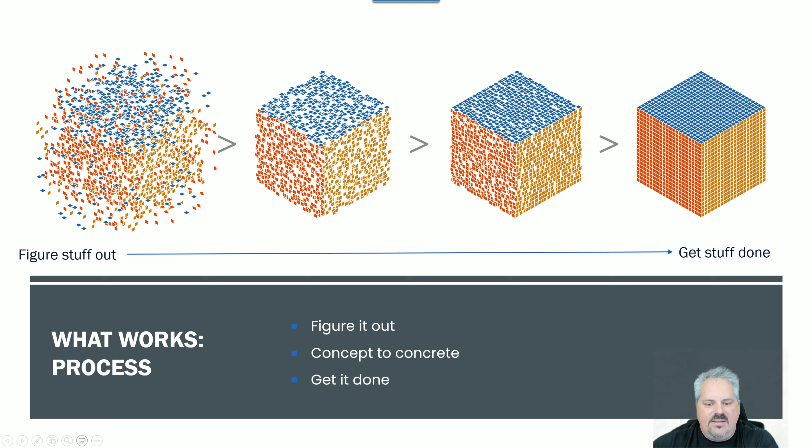When you think about collaboration, we often think about it as brainstorming or as one type of work to synthesize what's going on and create new insights. For example, that would be on the left side of the cube.

You can also think about collaboration as how do we engineer it? How do we create the piece parts or the components of what we're talking about, and structure those components to figure out what should be in our cube? And then we should maybe collaborate around how to test this out.

Collaborate to figure out what to test, how to test it, and who to test it on. That's collaboration as well. Then there's collaboration on how do we relate this to other people. How do we take what we've learned? How do we communicate and relate to others?

That's a whole collaboration process too. For example, role playing, creating a discussion that models the reality. And then finally, the transfer of an idea or a concept or something new to somebody else, that's collaboration too, in order for it to stick and for it to be adopted. So each of these are 5 different types of collaboration.

The reason why this is important is we often show up as salespeople trying to figure out how to sell it. I've heard phrases like 'I can't sell this concept,' 'I don't know how to communicate it,' 'I need to know how to sell it.' Well, perhaps somebody's at level 2 here, collaboration, where we're trying to engineer what the components are.

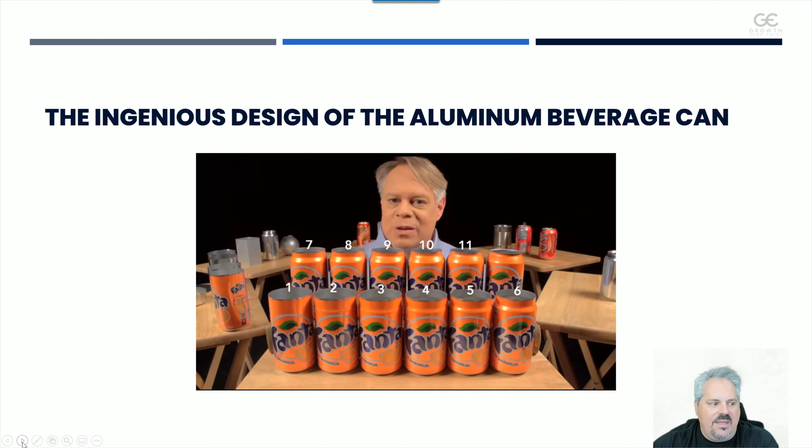If this is enough for you, you can stop the video now, but I'm actually going to show this video. I think it's fascinating, on how the soda can is created. What I want you to think about if you choose to continue is the way in which this was finally brought to market, layer 5. Think about all the steps that likely happened in layers 1, 2, 3, and 4 to get the soda can to the point where it's now. It's probably taken 20 to 100 years to figure out the shape and size and how the soda can works. It's fascinating when you watch this video. I hope you enjoyed it, and I hope you enjoyed thinking about collaboration. So let's get to it.

The ingenious design of the aluminum beverage can. Every year, nearly 500 billion of these cans are manufactured. That's about 15,000 per second. So many that we overlook the can's superb engineering.

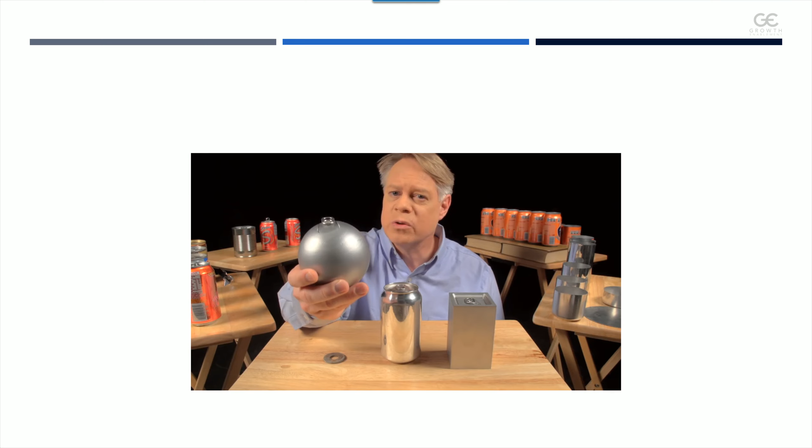Let's start with why the can is shaped like it is. Why a cylinder? An engineer might like to make a spherical can. It has the smallest surface area for a given volume, so it uses the least amount of material. It also has no corners, and so no weak points, because the pressure in the can uniformly stresses the walls. But a sphere is not practical to manufacture, and of course, it'll roll off the table.

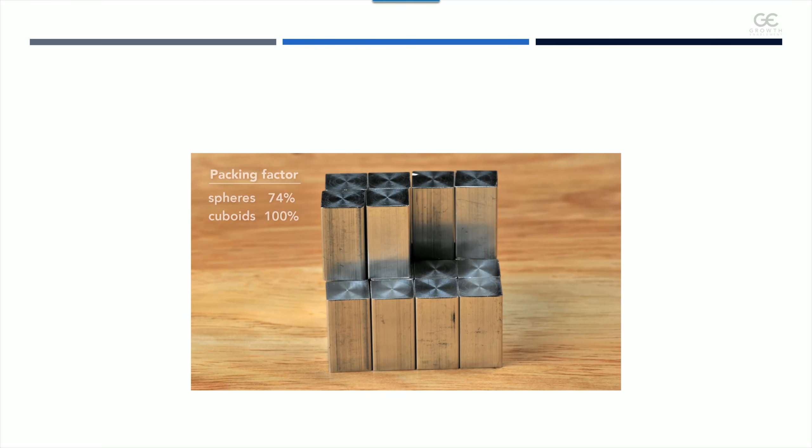Also, when packed as closely as possible, only 74% of the total volume is taken up by the product. The other 26% is void space, unused when transporting the cans or in a store display. An engineer could solve this by making a cuboid-shaped can. It sits on a table, but it's uncomfortable to hold and awkward to drink from. While easier to manufacture than a sphere, the edges are weak points and require very thick walls. But the cuboid surpasses the sphere in packing efficiency, with almost no wasted space, though at the sacrifice of using more surface area to contain the same volume as the sphere.

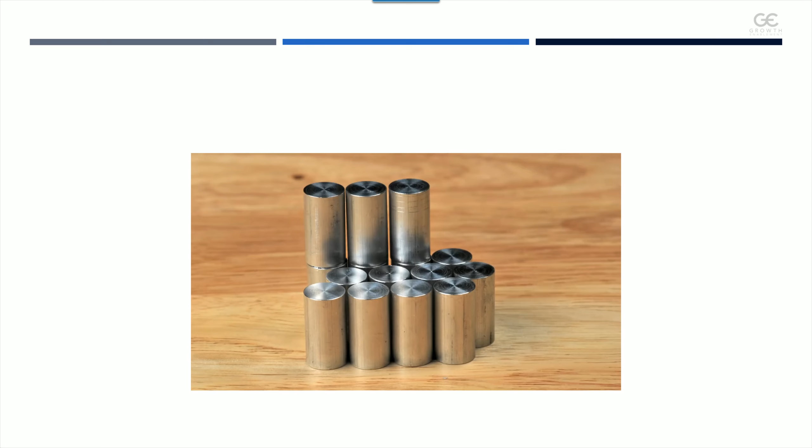So to create a can, engineers use a cylinder, which has elements of both shapes. From the top, it's like a sphere, and from the side, it's like a cuboid. A cylinder has a maximum packing factor of about 91%, not as good as the cuboid, but better than the sphere. Most important of all, the cylinder can be rapidly manufactured.

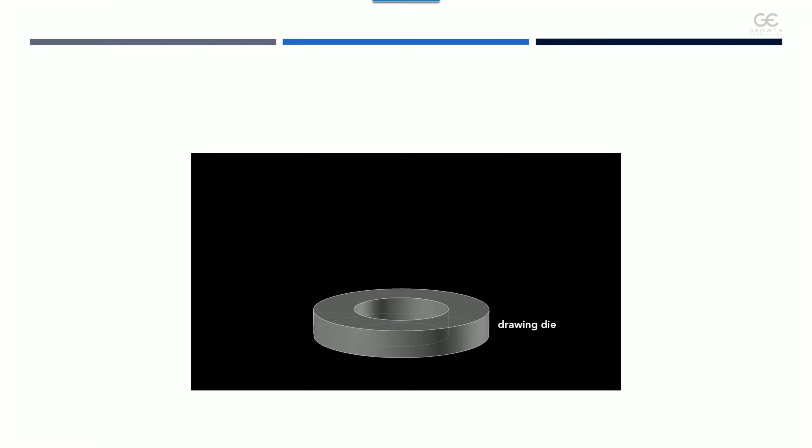The can begins as a disc called a blank, punched from an aluminum sheet about 3/10 of a millimeter thick. The first step starts with a drawing die, on which sits the blank and then a blank holder that rests on top. We'll look at a slice of the die to see what's happening. A cylindrical punch presses down on the die, forming the blank into a cup. This process is called drawing. This cup is about 88 millimeters in diameter, larger than the final can, so it's redrawn.

This is like our step 1 of our collaboration process, right? I won't interrupt again, but basically what he's doing is starting with step 1 of our collaboration process, and it'll get all the way to step 5.

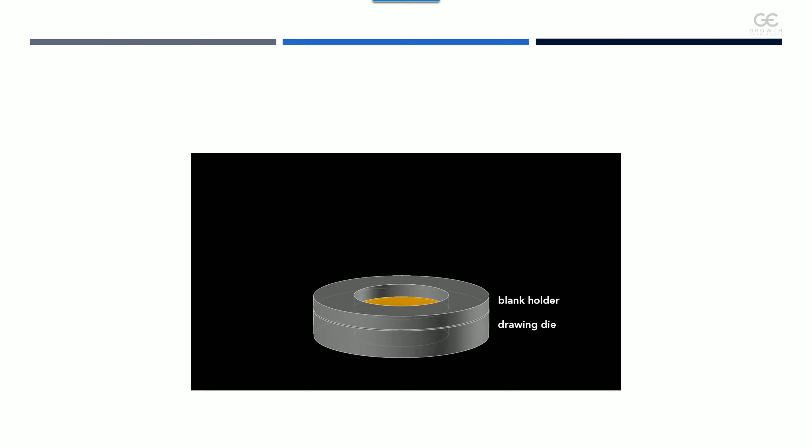The sheet is about 3/10 of a millimeter thick. The first step starts with a drawing die, on which sits the blank and then a blank holder that rests on top. We'll look at a slice of the die to see what's happening. A cylindrical punch presses down on the die, forming the blank into a cup. This process is called drawing. This cup is about 88 millimeters in diameter, larger than the final can, so it's redrawn.

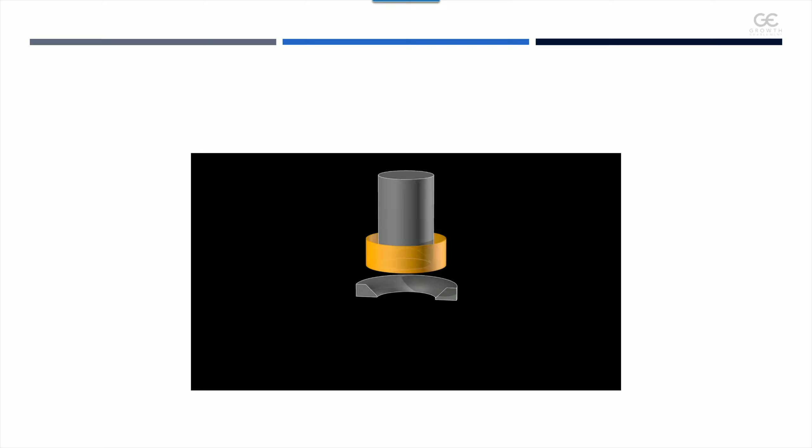That process starts with this wide cup and uses another cylindrical punch and a redrawing die. The punch presses the cup through the redrawing die and transforms it into a cup with a narrower diameter, which is a bit taller. This redrawn cup is now the final diameter of the can, 65 millimeters, but it's not yet tall enough. A punch pushes this redrawn cup through an ironing ring. The cup stays the same diameter as it becomes taller and the walls thinner. If we watch this process again up close, you see the initial thick wall and then the thinner wall after it's ironed.

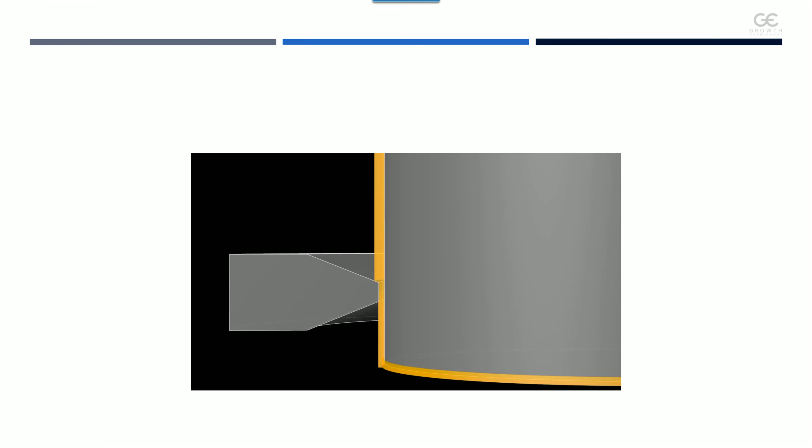Ironing occurs in 3 stages, each progressively making the walls thinner and the can taller. After the cup is ironed, the dome on the bottom is formed. This requires a convex doming tool and a punch with a matching concave indentation. As the punch presses the cup downward into the doming tool, the cup bottom deforms into a dome.

That dome reduces the amount of metal needed to manufacture the can. The dome bottom uses less material than if the bottom were flat. A dome is an arch revolved around its center. The curvature of the arch distributes some of the vertical load into horizontal forces, allowing a dome to withstand greater pressure than a flat beam.

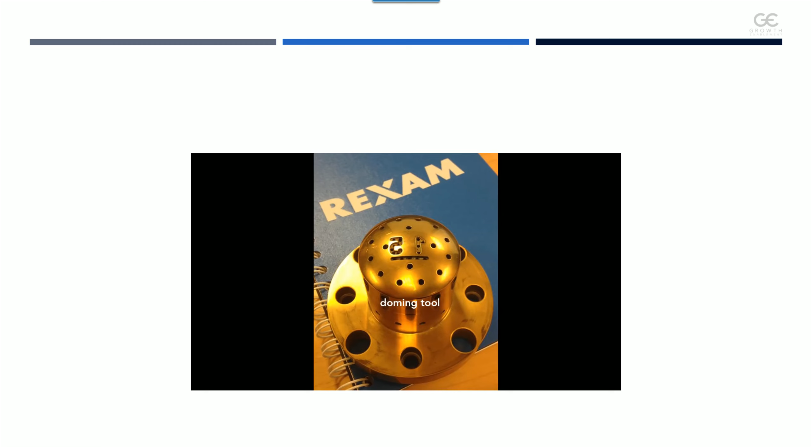On the dome, you might notice 2 large numbers. These debossed numbers are engraved on the doming tool. The first number signifies the production line in the factory, and the second number signifies the body maker number. The body maker is the machine that performs the redrawing, ironing, and doming processes. These numbers help troubleshoot production problems in the factory.

In that factory, the manufacturing of a can takes place at a tremendous rate. These last three steps, redrawing, ironing, and doming, all happen in one continuous stroke and in only a seventh of a second. The punch moves at a maximum velocity of 11 meters per second and experiences a maximum acceleration of 45 Gs. This process runs continuously for 6 months, or around 100 million cycles, before the machine needs servicing.

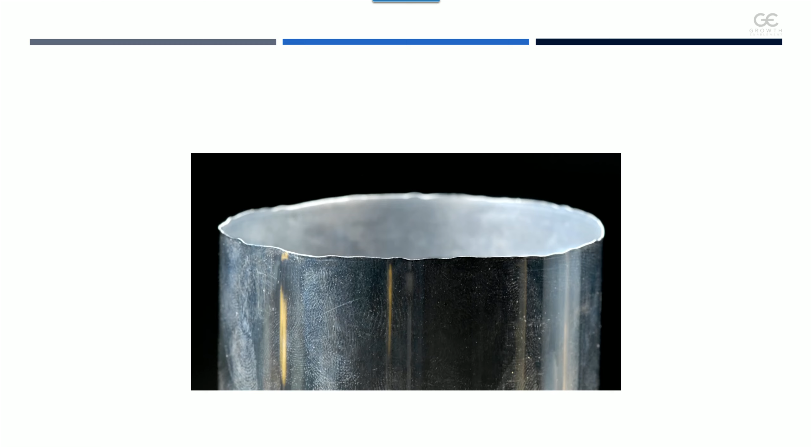Now, if you look closely at the top of the can body, you see that the edges are wavy and uneven. These irregularities occur during the forming. To get a nice, even edge, about 6 millimeters is trimmed off of the top. With an even top, the can can now be sealed.

But before that sealing occurs, a colorful design is printed on the outside. The term of art in the industry is decoration. The inside also gets a treatment. A spray-coated epoxy lacquer separates the can's contents from its aluminum walls. This prevents the drink from acquiring a metallic taste and also keeps acids in the beverage from dissolving the aluminum.

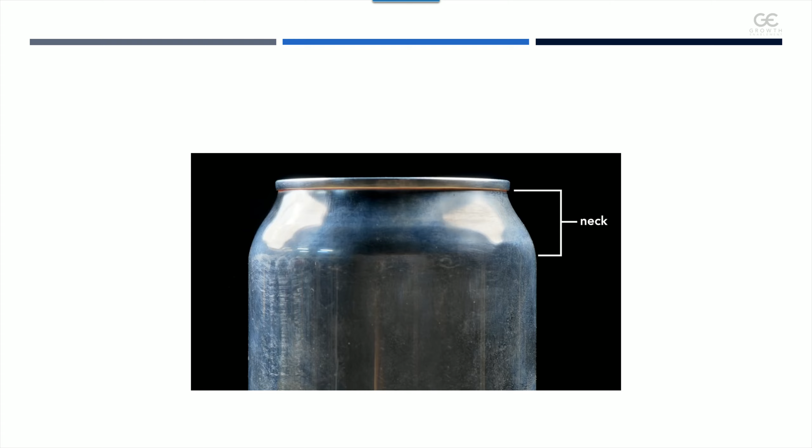The next step forms the can's neck, the part of the can body that tapers inward. This necking requires 11 stages. The forming starts with a straight-walled can. The top is brought slightly inward, and then this is repeated further up the can wall until the final diameter is reached. The change in neck size at each stage is so subtle that you can barely tell a difference between one stage and the next.

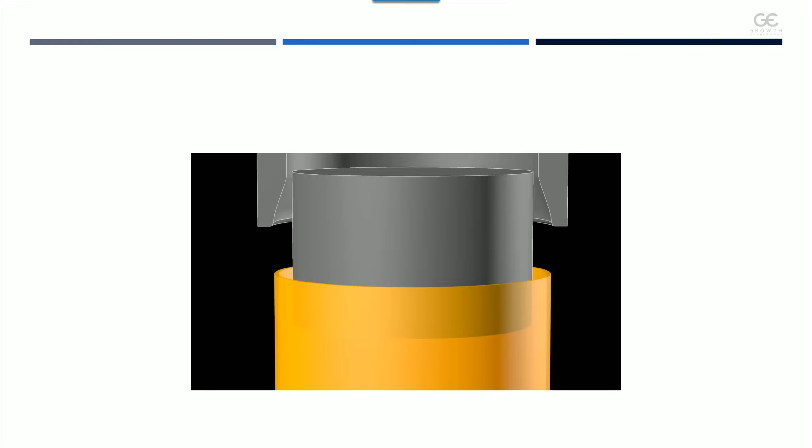Each one of these stages works by inserting an inner die into the can body, then pushing an outer die, called the necking sleeve, around the outside. The necking sleeve retracts, the inner die retracts, and the can moves to the next stage. The necking is drawn out over many different stages to prevent wrinkling or pleating of the thin aluminum.

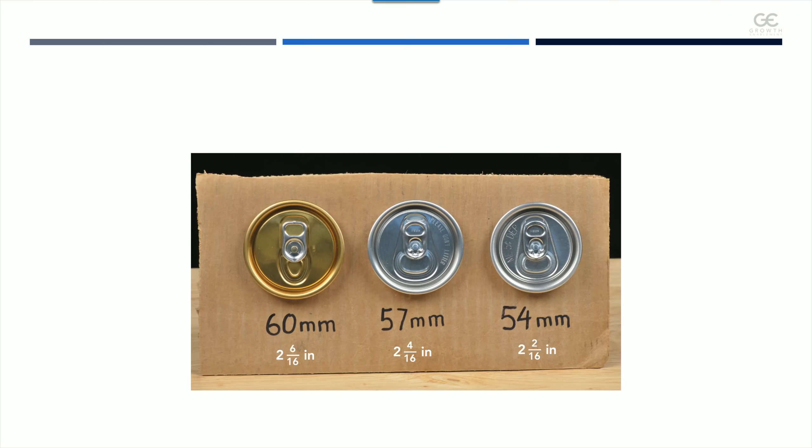Since the 1960s, the diameter of the can end has become smaller by 6 millimeters, from 60 millimeters to 54 millimeters today. This seems a tiny amount, but the aluminum can industry produces over 100 billion cans a year, so that 6 millimeter reduction saves at least 90 million kilograms of aluminum annually. That amount would form a solid cube of aluminum 32 meters on a side. Compare that to a 787 Dreamliner with a 60-meter wingspan.

Now, after the neck has been formed, the top is flanged. That is, it flares out slightly and allows the end to be secured to the body, which brings us to the next brilliant design feature, the double seam. On older steel cans, manufacturers welded or soldered on the ends. This often contaminated the can's contents. In contrast, today's cans use a hygienic double seam, which can also be made faster.

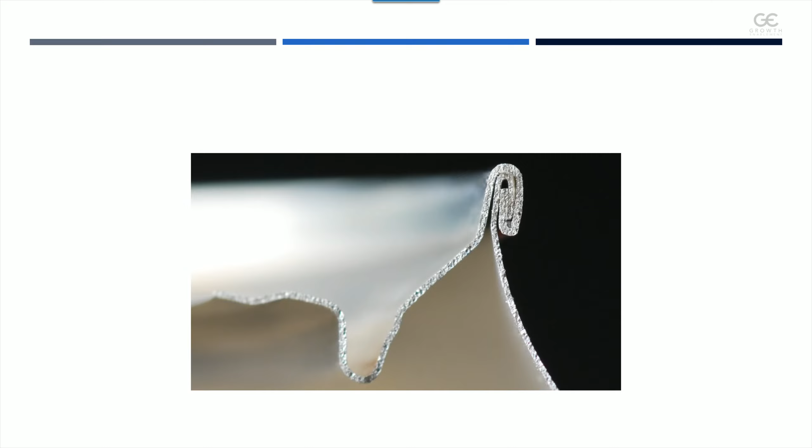This can is cut in half so you can see the cross-section of the double seam. To create this seam, a machine uses two basic operations. The first curls the end of the can cover around the flange of the can body. The second operation presses the folds of the metal together to form an airtight seal. While the operations themselves are simple, they require high precision. Parts misaligned by a small fraction of a millimeter cause the seam to fail.

In addition to the clamping of the end and can body, a sealing compound ensures that no gas escapes through the double seam. The compound is applied as a liquid, then hardens to form a gasket. The end, attached immediately after the can is filled, traps gases inside the can to create pressures of about 30 psi, or 2 times atmospheric pressure.

In soda, carbon dioxide produces the pressure. In non-carbonated drinks like juices, nitrogen is added. So why is a beverage can pressurized? Because the internal pressure creates a strong can despite its thin walls. Squeeze a closed, pressurized can, it barely gives. Then squeeze an empty can. It flexes easily. The can walls are thin, only 75 microns thick, and they're flimsy.

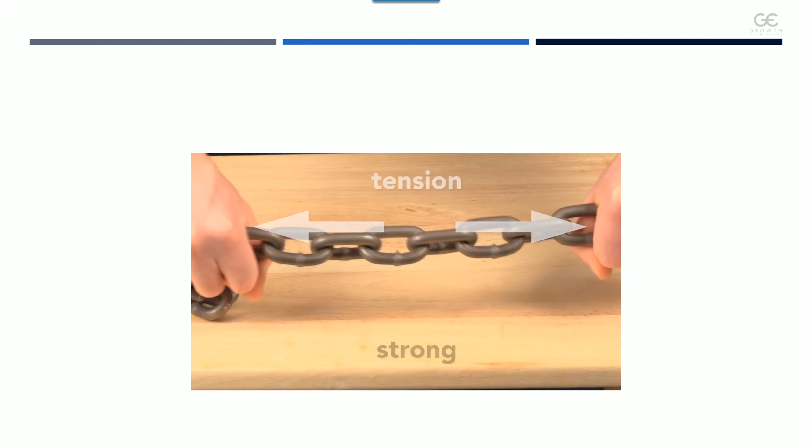The internal pressure of a sealed can pushes outwards equally and so keeps the wall in tension. This tension is key. The thin wall acts like a chain. In compression it has no strength, but in tension it's very strong. The internal pressure strengthens the cans so that they can be safely stacked. A pressurized can easily supports the weight of an average human adult.

It also adds enough strength so that the can doesn't need the corrugations like in this unpressurized steel food can. Initially pressurized to about 2 atmospheres, a can may experience up to 4 atmospheres of internal pressure in its lifetime due to elevated temperatures, and so the can is designed to withstand up to 6 atmospheres, or 90 psi, before the dome or the end will buckle.

Why is there a tab on the end of the can? It seems a silly question - how else would you open it? But originally cans didn't have tabs. Very early steel cans were called flat tops for pretty obvious reasons. You'd use a special opener to puncture a hole to drink from and a hole to vent.

In the 1960s, the pull tab was invented so that no opener was needed. The tab worked like this: you lift up this ring to vent the can and pull the tab to create the opening. Easy enough, but now you've got this loose tab. The cans ask you to please don't litter, but sadly these pull tabs got tossed on the ground where the sharp edges cut the bare feet of beachgoers or harmed wildlife.

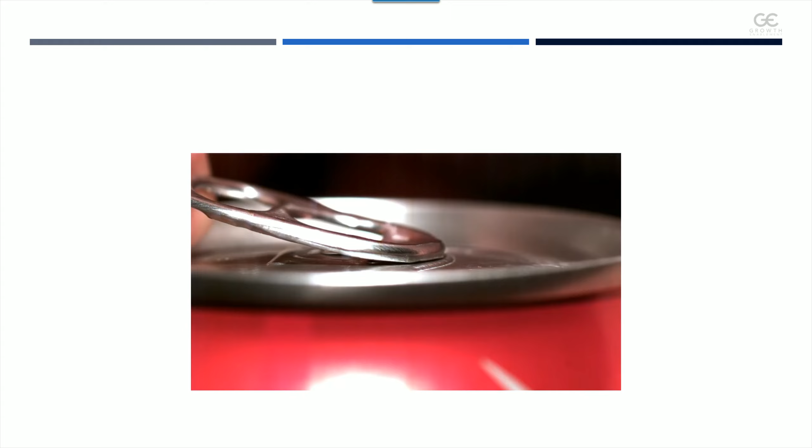So the beverage can industry responded by inventing the modern stay-on tab. This little tab involved clever engineering. The tab starts as a second-class lever - this is like a wheelbarrow, because the tip of the tab is the fulcrum and the rivet is the load. The effort is being applied on the end.

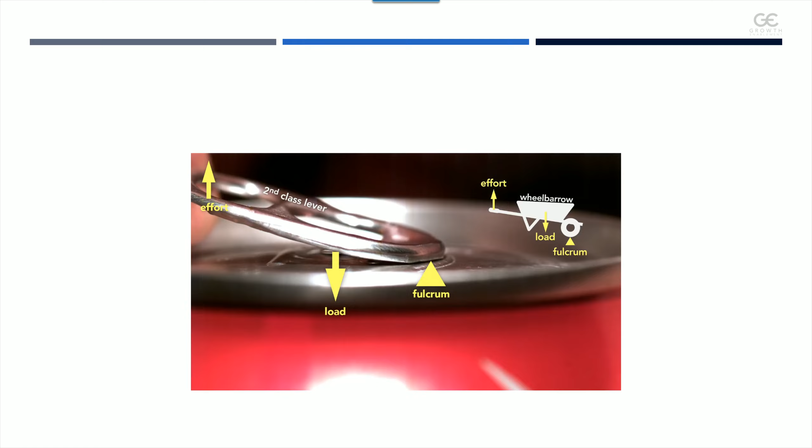But here's the genius part: the moment the can vents, the tab switches to a first-class lever, which is like a seesaw, where the load is now at the tip and the fulcrum is the rivet. You can see clearly how the tab, when working as a wheelbarrow, lifts the rivet.

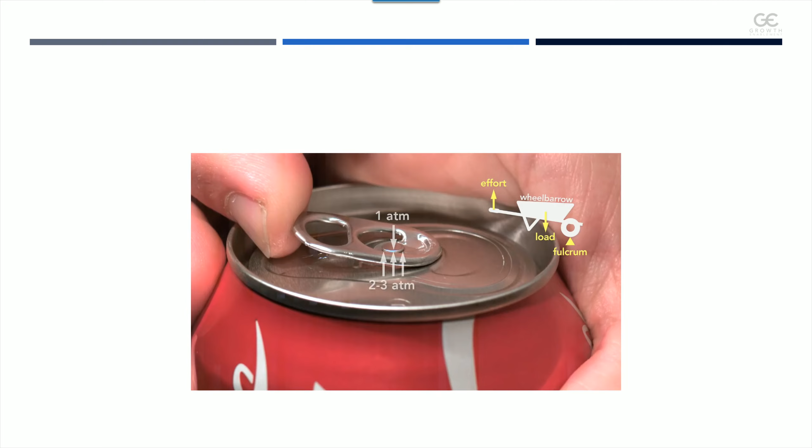Part of the reason this clever design works is because the pressure inside the can helps to force the rivet up, which in turn depresses the outer edge of the top until it vents the can, and then the tab changes to a seesaw lever.

Looking from the inside of the can, you can see how the tab first opens near the rivet. If you try to simply force the scored metal section into the can using the tab as a first-class lever with the rivet as the fulcrum throughout, you'd be fighting the pressure inside the can. The tab would be enormous and expensive.

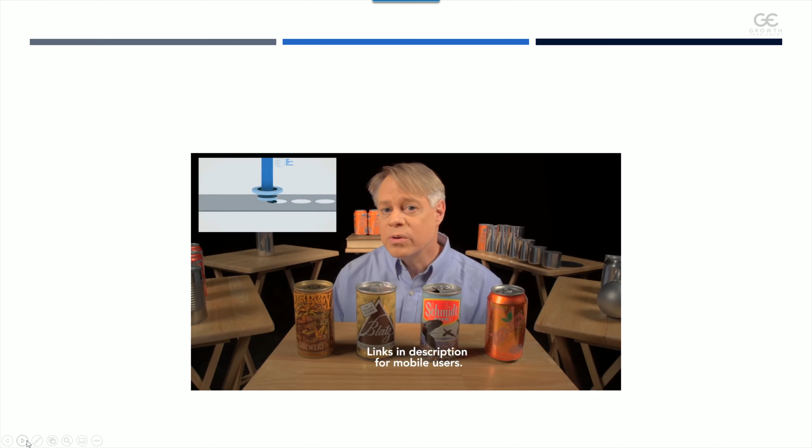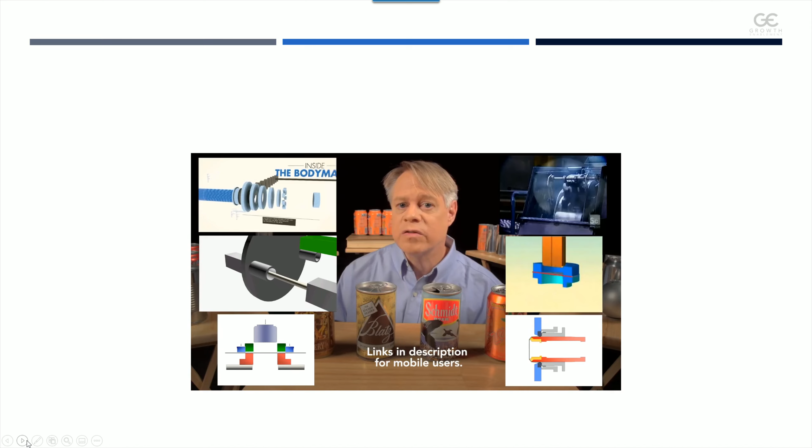The aluminum beverage can is so ubiquitous that it's easy to take for granted. But the next time you take a sip from one, consider the decades of ingenious design required to create this modern engineering marvel. I'm Bill Hammack, the Engineer Guy.

So when you think about it, if you're still here, the can itself goes through 5 steps, but think about the 5 steps as it unfolded over time to even come up with that can. And then finally, think about the video and the production of this video to create this video. I don't know if you saw it, but it was pretty much one continuous take. When you look at the stages, how they created it, the cut-ins, all of that, it's a great level 5 video to transfer the idea of a can to us.

But if you think about all the collaboration that happened to build it, it went through the idea, the engineering of the video, the testing, probably the mock-ups and storyboarding of the video, and then how to figure out how to relate these concepts, where to draw in the animations of the wheelbarrow, where to figure out how to explain why decoration is important, things like that. So the focus may be on how do we get to transfer this video over, but the can video itself likely had to go through these 5 layers of collaboration. So this is something to think about as you collaborate with others.